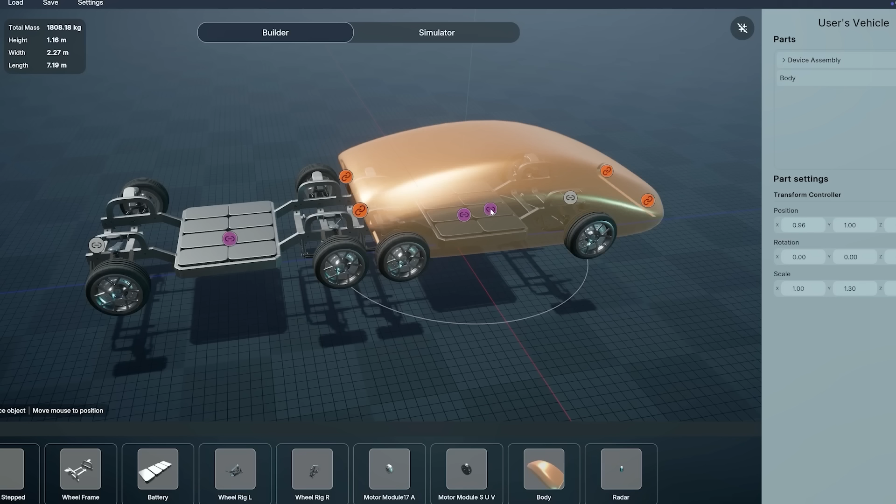I'm so excited to go into this. So, DonutOS really changes the way EVs are built. And the first thing I want to talk about is what we call the digital twin 2.0. We all probably have heard the term digital twin. In the automotive industry, I call it the digital distant cousin, because it doesn't really resemble the real physical device.

It may have the appearance of the physical device. It may have some weight distribution calculations that are exactly like the physical device, but it doesn't really replicate the behavior of the physical device. It doesn't run the same software as the physical device. It doesn't really allow you to know, how does my vehicle really work? And that's going to change today.

So Donut Lab Digital Twin 2.0 means these things. First of all, it's a high-fidelity vehicle with all the Donut platform components, from the batteries, from the motors, from all the hardware that we built, and of course, using any third-party components that are part of the platform. You can then test the vehicle in the real world digitally.

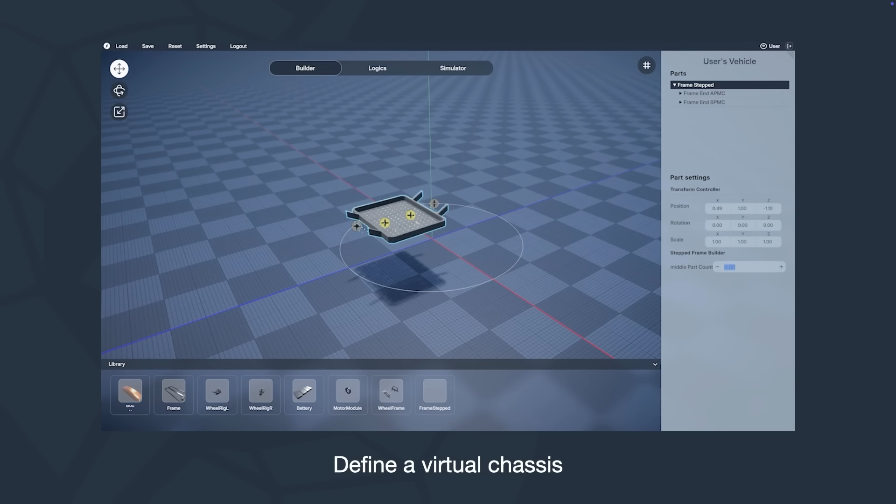In the Builder, you really build first the core of your vehicle, and so it starts from choosing what kind of vehicle you want to build, from cars to boats to trucks and drones and robots, even motorcycles, whatever you want to create. And after selecting the type, you can then define the virtual chassis with all kinds of components that make it exactly like it should be.

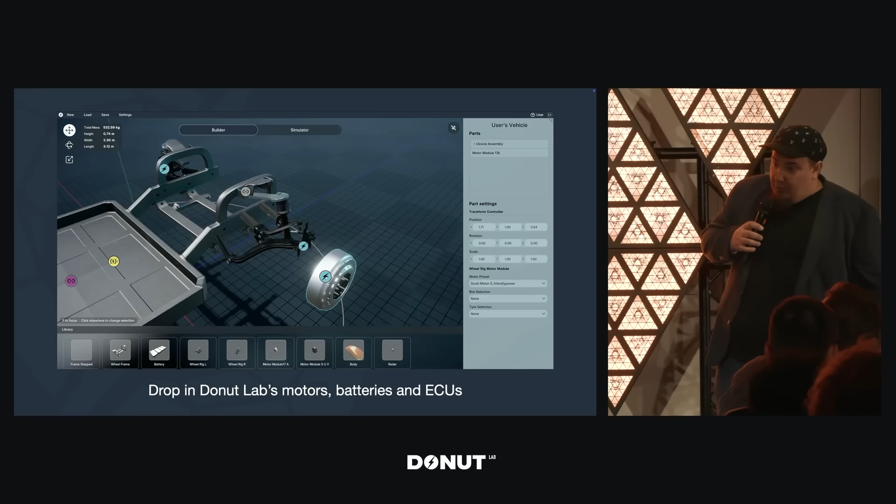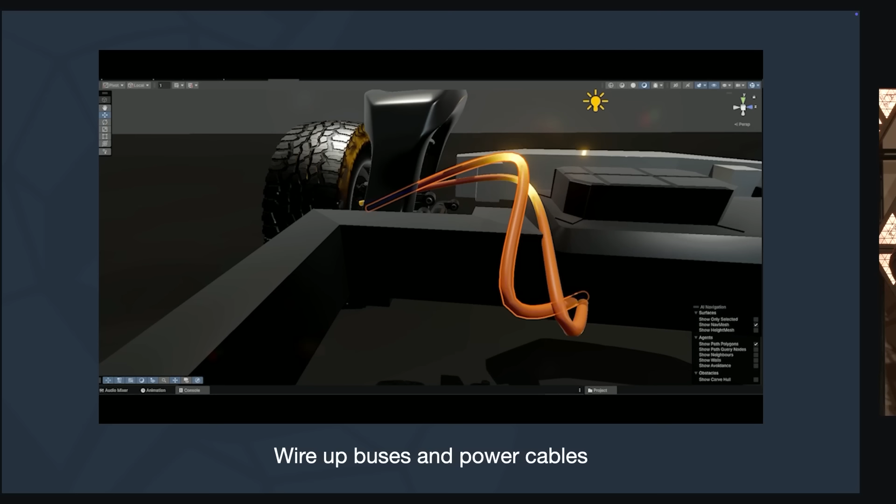After building the chassis, you can then assemble everything together, including the motors and the batteries, the ECUs, all the various components that you wanted to use. You now need to find a physical place for them, including the sensors. Where is the camera located? Where are the lights? How about the buttons that you need to press? Even wiring up buses and power cables visually to make sure that the latency is right, dependent on the length of the cable that you need.

And finally, you get to fine-tune everything that you create with precise placement of components and with the ability to adjust every single parameter of every single component that you have in your model. And to show you a little bit more, I'd love to invite on stage Olli Burke to show the live demo of Builder.

Hello, everyone. I'm Olli from the Donut software team, and I'd like to say first that one of the key design principles we had for the Donut Builder was that it should be as easy to use as building with Legos. So today I'm here to demonstrate how anyone can create a vehicle with Donut Builder without the need to go too deep into logic or any engineering levels.

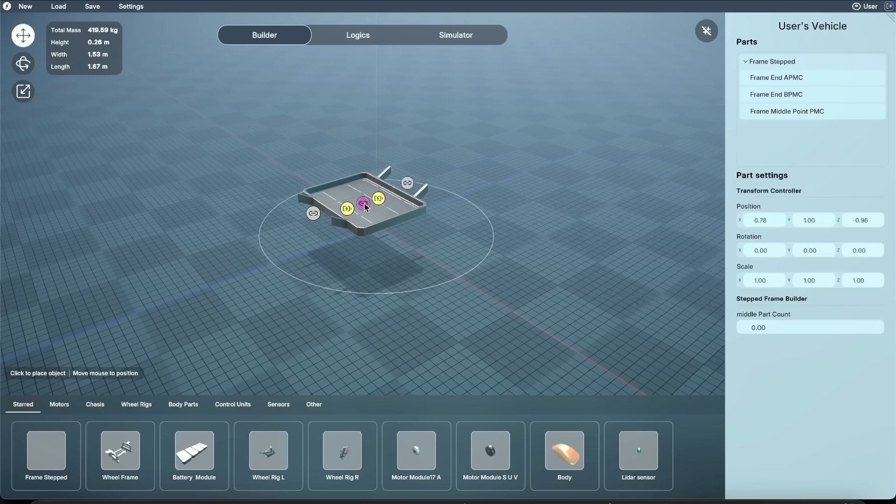Let's start. First, from a library, we have different kinds of components like Donut motors. And let's start making the chassis. So we first start dragging the frame into there. And next, we change the size so we can fit more batteries into it. And from there, we choose a wheel frame, put it to the back of the car, and next into the front of the car, just by clicking it into place.

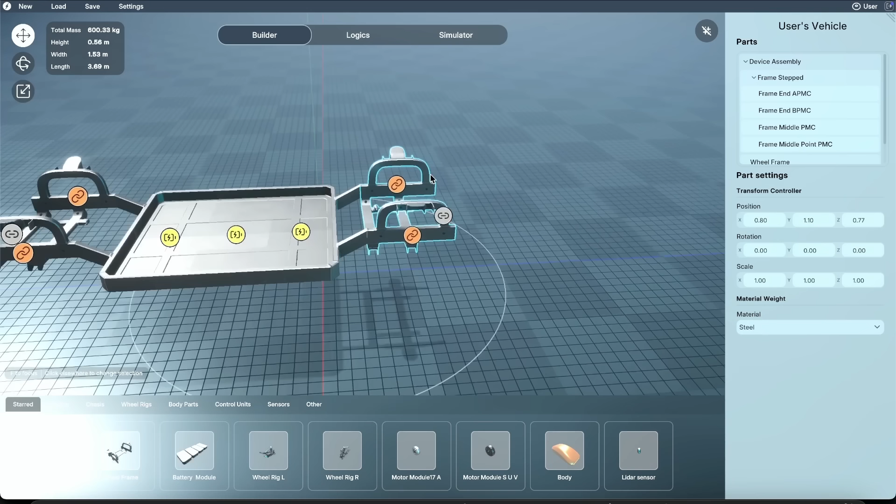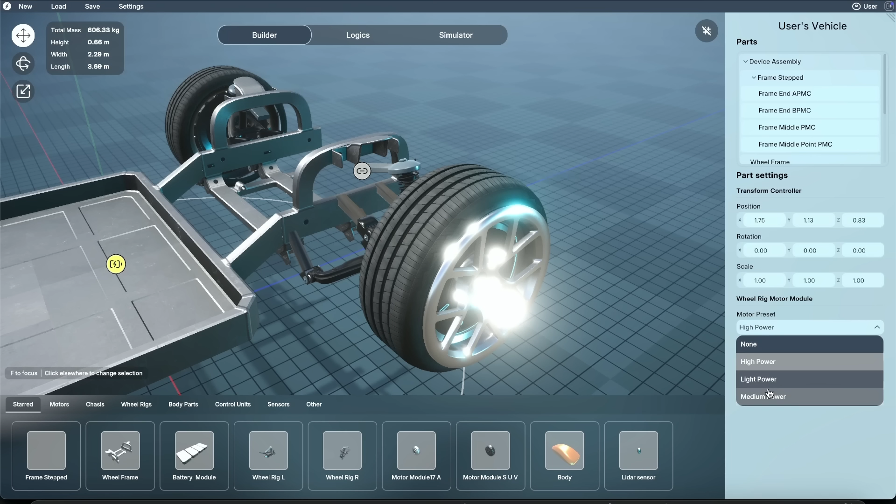And next, let's choose the wheel rigs. Let's connect them together. It will automatically mirror the settings on the other side. And let's make the important part, the Donut motor there, where we can choose different kinds of rims and tires, and what kind of motor preset we want to use for it. So let's choose high power for the front. And let's do the same for the back as well.

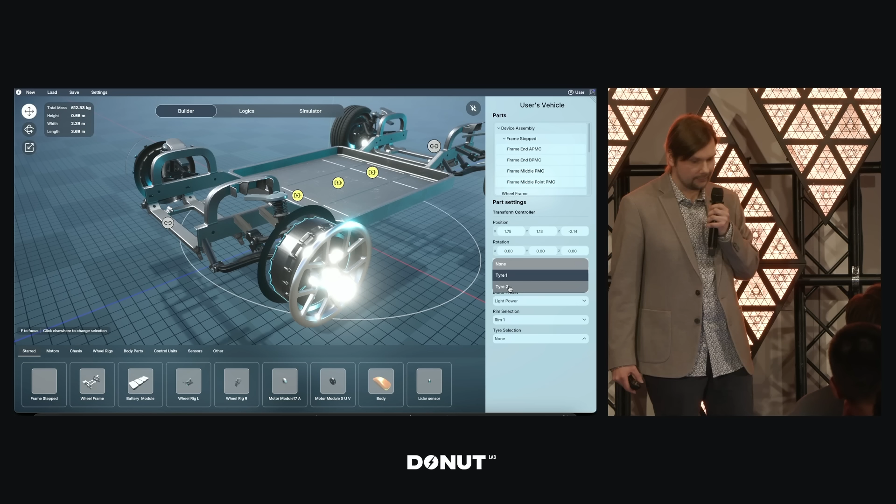So let's put the wheel rig directly there, and let's choose the Donut SUV motor to place it in the back. And let's put a little bit lighter powered preset in there, and the rims and the tires as well. And now we have the chassis complete. Let's start adding the battery modules into the car. In the same way, we simply drag them into the place which is defined in the chassis frame part. Just like this. All right.

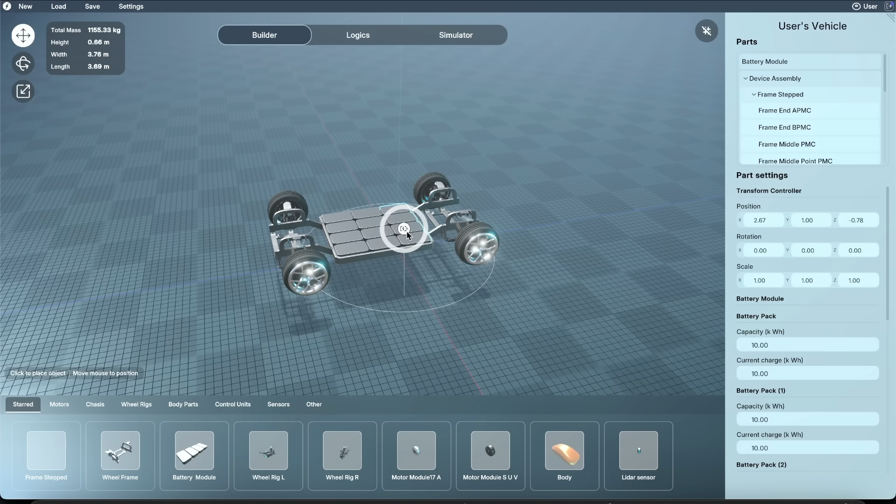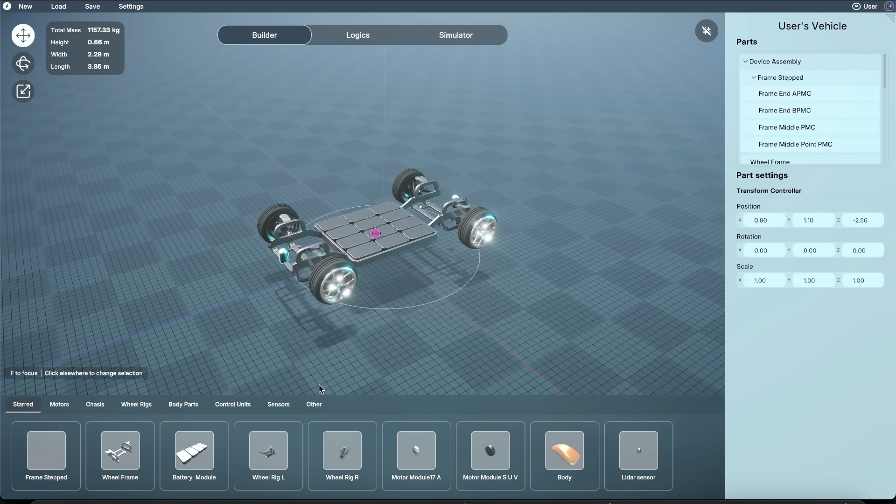So next, let's put some sensors into the car. We have a LiDAR sensor there. We just drag it into the front part of the car and click it into place, and also for the back. And from there, we just need to add a body to the car, just like this. Put it into the center, and then we can change a few parameters to raise it and make it a little bit bigger. Just like this. And now we have a fully drivable car which uses actual real-world counterparts in a simulated world.

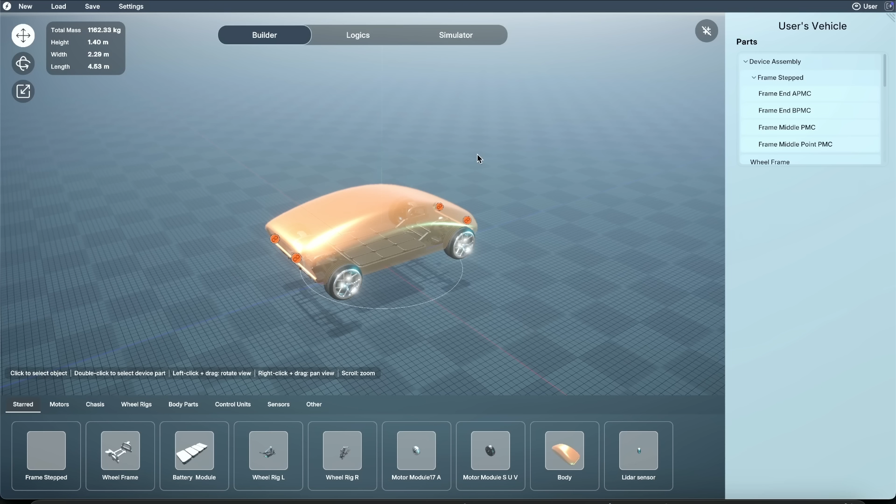And from here, we could go and check out how the logic works. We could make some changes here if we need. But for fun, we just click on the simulator and let's try how the car itself works. So here, we can just start driving. Thank you, Olli. Thank you.

Besides the car, of course, you can build other vehicles. So I'm just demonstrating here a couple of things about building drones and even boats. And all of the sizes and dimensions and what kind of battery packs you want to put in there, everything is fully customizable. And you can even bring in your own CAD designs to use the real-world components if you don't want to use the built-in libraries.

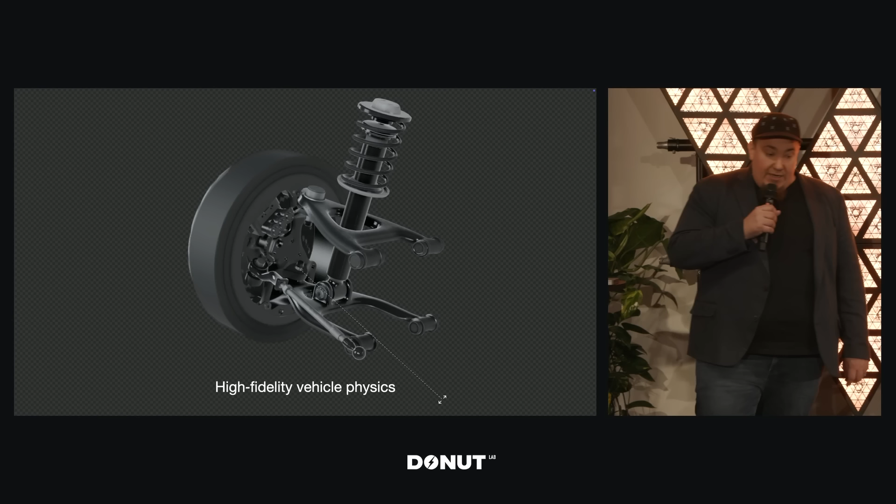So let's talk about DonutOS Simulator. This is the place where you go do physics-based vehicle testing in a virtual environment. Right here, we are actually driving in Pasila, so the roads may look familiar. And it allows you to test every single aspect of your car on the real roads. We are doing high-fidelity vehicle physics. Here we're looking at the suspension settings, and you have all the parameters in the world that you would want to adjust to make the drive exactly perfect for your vehicle.

As mentioned, all the software that runs inside, for example, this truck prototype right here, is the same that will then finally run inside that truck when you build it the first time and drag and drop the logic into the physical vehicle.

We even have the Verge bike here without the rider, but rest assured, the vehicle physics are calculating the rider being on top of that vehicle. The simulator also has full support for simulating the cameras and the radars and sensors and everything in real time. So as you drive, you will be able to look at the behavior, what happens in the CAN bus and in all different data streams coming from the car.

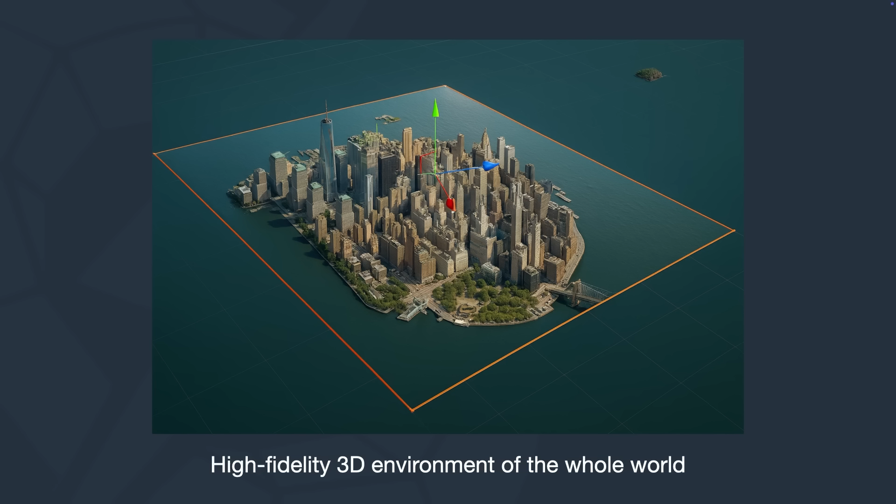But where can you drive? Well, the simulator brings us to the world-scale digital replicas, where we have high-fidelity 3D environments of the whole world. So you can go and see how long the battery lasts when you start driving 101 from San Francisco towards LA. And then, after testing, realize that I'll add one more battery pack, and then I'm good to go. You can literally take your vehicles everywhere.

Here we are again, looking at our beautiful Pasila here in Helsinki with a drone and seeing how everything looks from high up there. You can change conditions of the world in real time, from climate, including snow, rain, heat. You can change the visibility and time of day to make sure that the lights are working exactly correctly, change all the road surface conditions, and even bring in traffic and edge cases.

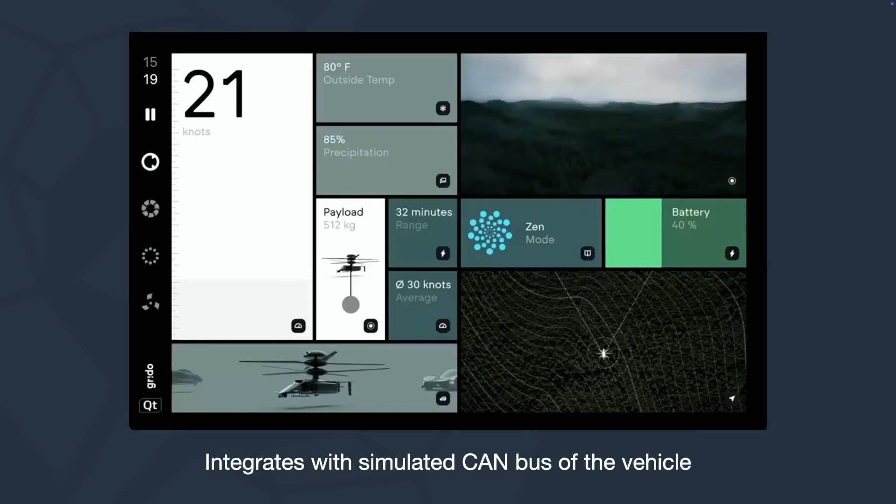And finally, you get to test and validate HMI. So the HMI integrates with the simulated CAN bus of the vehicle, so it works exactly the same as the real physical HMI will. So that includes the data that is displaying, whether it's G-forces or speed of your vehicle, but also it allows you to control the behavior of the vehicle exactly the same way too. So when you change the drive mode, it changes in the digital twin. You can test and iterate throughout the UI, and really for the first time in a digital world, validate the entire vehicle experience.

When you need to trigger some sensors, you need to introduce errors, you need to see what happens when the battery cells go out of balance or the pack is too hot. What happens? You can go and trigger these faults and errors. And also you can compare the ground truth of what happens in the digital twin and compare that to your sensor fusion that you are testing.

The last component of DonutOS is the inspector. And it's really a component that provides operational clarity for everything you do. It includes the real-time telematics dashboard that allows you to fully customize what you want to see, to understand all the behavior of your vehicle through the points of data. It can stream radars, cameras, and all other things that you will need.

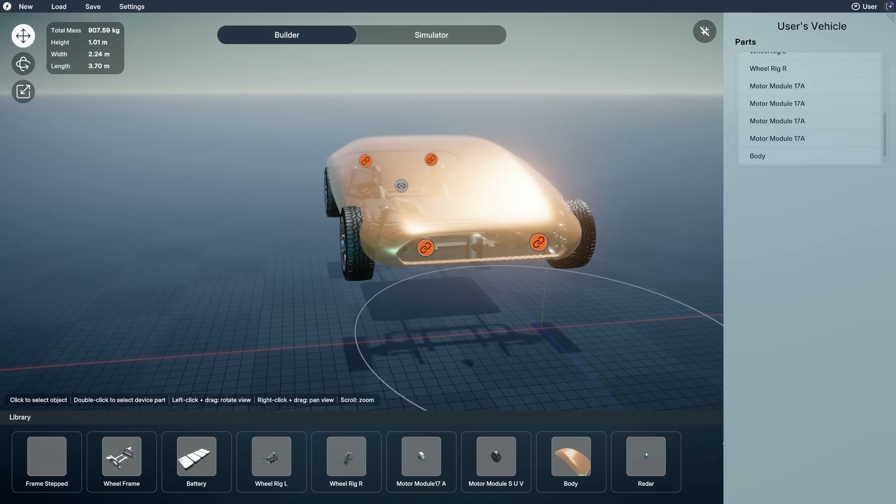All right, thank you. So yeah, I'm Ari from the software team, giving you a quick demo of the inspector. The inspector is basically split into 3 different modes. I'll go through them one by one. Let's first add some sensors onto the car in the builder, basically where Olli left off. And then when we're done, we can just jump in to the simulator.

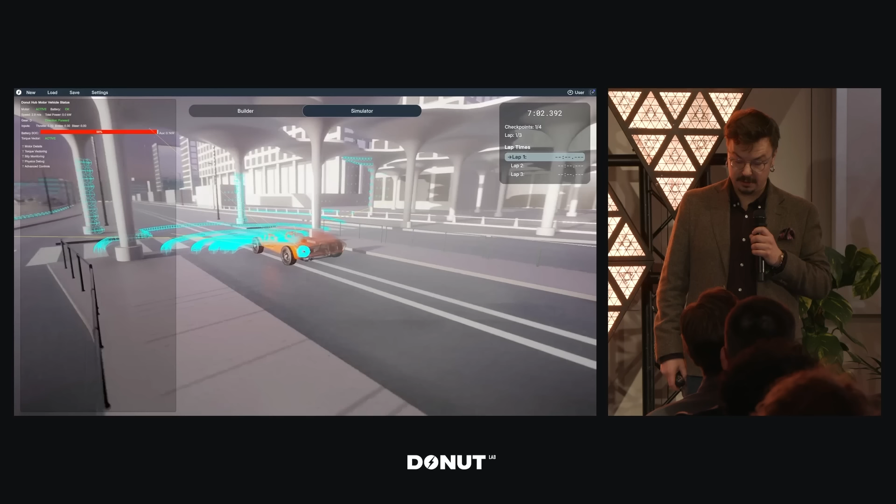All right, so the first layer is simulation time telemetry, which kind of means that we can just overlay all of our data from all of our sensors everywhere in the vehicle straight onto the simulator, and that way get instant feedback of what we're doing. Here's the demo of the LiDAR working, colliding with points and giving you a readout. And here, carefully driving through the Pasila Tripla shopping mall poles, not crashing into anything. Obviously, this data can be used then to create alerts in the vehicle for nearby objects and stuff like that.

Next, we have some more detailed motor readouts. We have everything from newtons to kilowatts to voltage consumption, all in real time.

And we can check that out. And then some more about the torque vectoring. These motor commands are filtered through the torque vectoring in real time, so we don't get full power all the time. And then wheel slip that controls the torque vectoring. It's all very clear. Then some physics debugging stuff. Basically anything you would want to get.

Then the next layer is the telemetry server, which means that we can actually stream all that data that we just saw onto a server and then display it basically anywhere. This is a web browser interface that's totally customizable with whatever data you want to display. Here we have some speed, RPM readouts, then obviously the GPS. We can also isolate views to give a better, more detailed look here at the GPS stuff. Again, running down Pasila.

Also, we can visualize the radar again on the web browser, so display anywhere the same data, different kind of visualization. So everything is customizable. We can also do native apps. So this is running on Qt, so we can do Android, iOS, desktop, laptop, website, whatever, even embedded hardware directly on the vehicle to display the exact data that we want. And here's one more view of the data from Qt. And on the right there, you can see the actual readout. So there's a lot of data coming in all the time.

Glazeworks exists to accelerate the most ambitious startups in EV, robotics, and AI-native hardware. By AI-native hardware, we mean anything from AI-enabled wearables, smart drones, smart vacuum cleaners, whatever. Fill in the gap. We want to talk with you. We're launching early next year a 1,100 square meter space in Tallinn, Estonia, for those who don't know where Tallinn is. It's a space that has everything you need under one roof to go from an idea for a product to scale in the same place.

We're building out an advanced fabrication studio, which will have a 3D printing farm, all the advanced machining tools you need, everything to do PCB manufacturing and prototyping, as well as a dedicated extended reality review area. So you can pull in your 3D CAD designs, review them in real time with your team, make notes, make changes, and really accelerate the production process of your concept.

It's important that your company looks good, so we're also launching in that space a creative studio, which will have our own dedicated Glazeworks podcasting setup, where you can be on that podcast, help promote your company, or even launch your own podcast out of there. We have batteries included, so everything for video, audio, and photography will be available on site to make sure you can produce the best content for your company and really shine when you speak to your potential customers and investors.

Of course, there is office space. We want it to be a very easy fit for anybody that comes there. So everything's fully equipped. You just show up, bring your team, and start building. For smaller teams, there are also co-working spaces and hot desks.

Finally, on site, we have a bunch of meta services, which includes access to mentors, some of them in the space itself, experts from all different domains of technology and development that can really help you refine and structure your product as you're developing it. And in-house, we have Venture Bonsai, our fundraising partner that is there to help you refine your pitch, get access to investors, and really help you put your best foot forward.